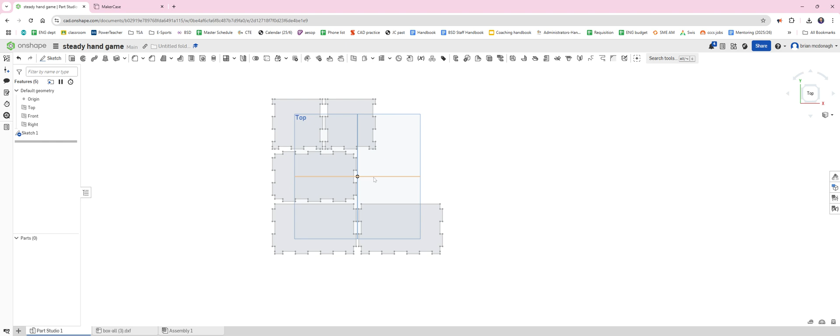Alrighty guys, this is the second video tutorial for the Steady Hand game. In this tutorial we're going to make some additional shapes in here so we can have spaces for the buzzer, LED, and some wires and whatnot.

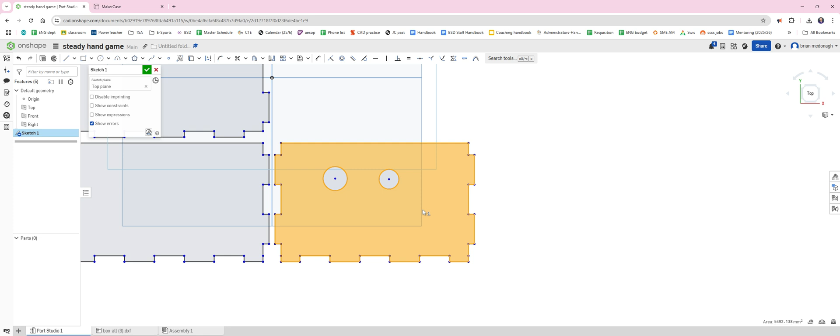So let's double click on sketch 1 and we're going to work over here. This is going to be our front panel. So we want to make a hole for our LED, and we also want to make a hole for our buzzer. Now, from memory, I'm remembering that our LED is 5 millimeters in diameter. So, whoa, oopsie-doozles. So over here, what we're going to do is we are going to dimension this 5 millimeters in diameter. And for our buzzer, we want to make a hole 12 millimeters in diameter.

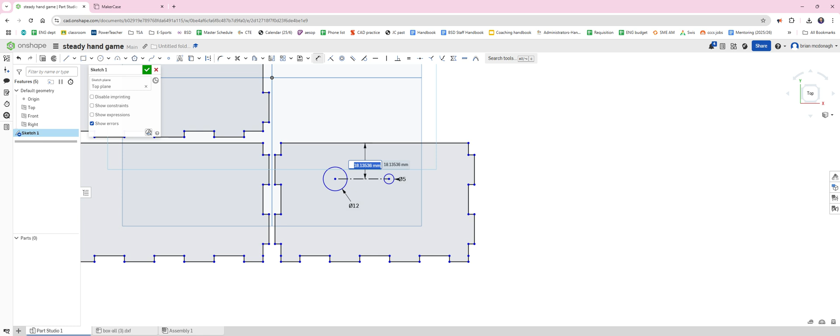Let's make a straight line. That's not very straight. Let's take this and tell it to be straight. Boom. And let's make this the distance from here to here. Well, you know what? I'm feeling like 15 is a good number there. 15 is a good number because it's leaving a good amount of meat here on the wood so that it's not going to break through.

Now the next thing we're going to do is let's put a center point there. Let's define the center point, and then let's define the length of this line here. Let's define this as 25. Now we're going to put a point up here in the center, the midpoint of there, and we're going to tell both of these guys to line up. So, oh, that didn't work too well, did it now? Let's take this and let's lock it in place. That's now fixed, and let's take these and let's lock these vertically in place, constrain them. Cool. Now both of those are black, so they are fully defined.

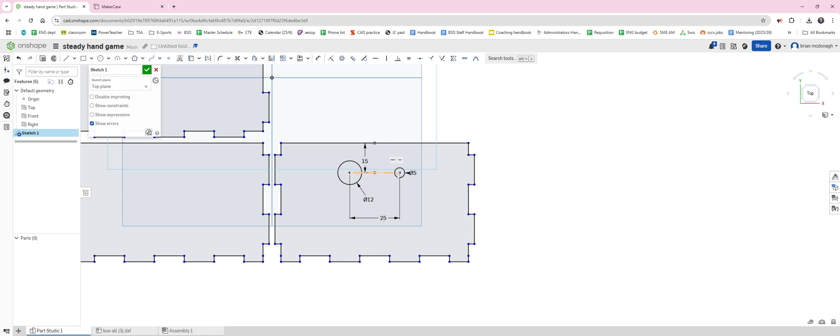Sweet. So the hole on the left hand side is going to be for our speaker or buzzer, and the hole on the right hand side is going to be for our LED. So that's going to be on the front. On the side of our box, we do need a hole for our wire to come out and also a bolt to secure the wire frame.

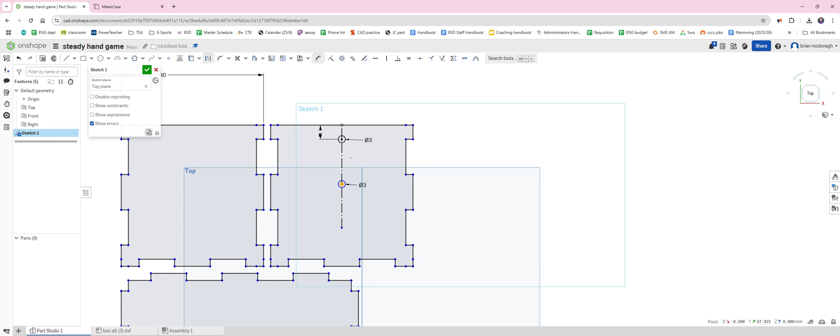So let's start off again by putting a point here in the center. Let's take that point and let's fix it in place. And now let's make a construction line down. There we go. So we want 2 holes. The size of these holes are both going to be 3 millimeters in diameter. Okay, and now let's have a look. What distance should we have up there? You know what? I'm feeling like 6 millimeters is a good distance. And in between them, 6 millimeters again, that's a good distance.

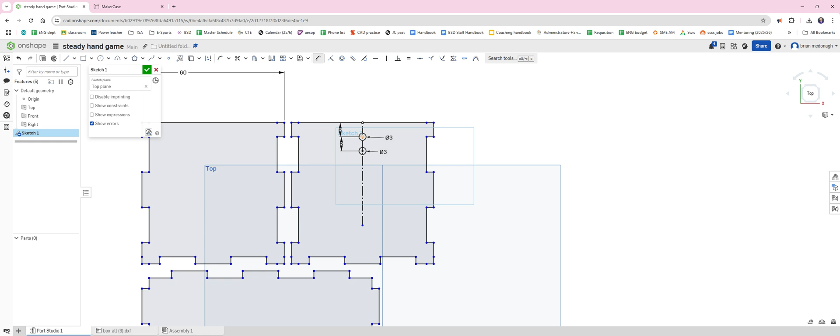And what I mean by a good distance is there's enough material here so it's not going to break, and there's enough material here it's not going to break. And also we're trying to keep these high so that when our wire comes up we can attach it there, and then when our metal path wire comes down here, it's also not coming down too far.

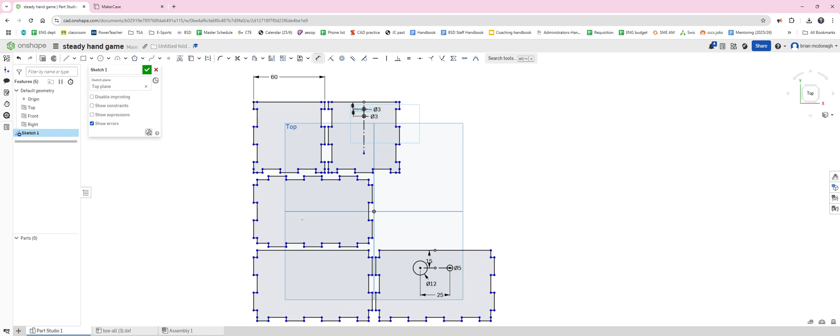Okay, that looks good. So we have a place for our wires, we have a place for our speaker and our LED, and our Arduino board is going to sit in here. Looks good, guys. Okay, give that a go.